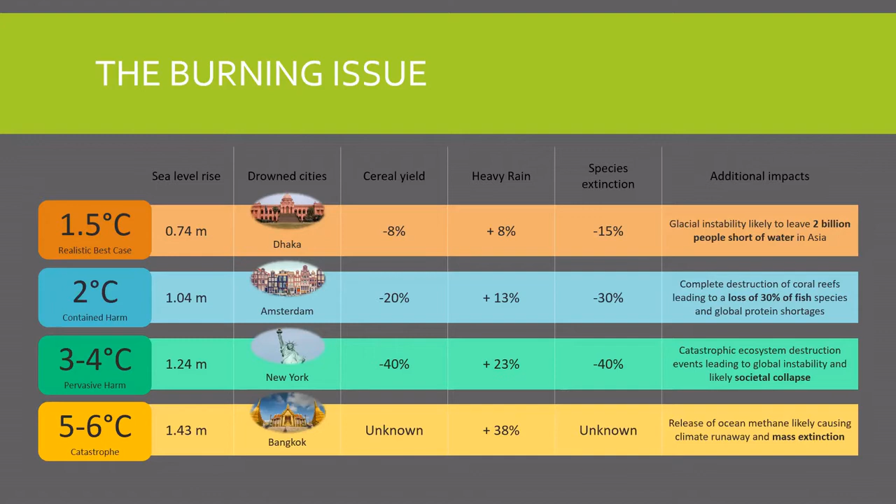So the Green New Deal primarily aims to achieve a just transition away from our current way of living to a low carbon way of living, ideally achieving net zero by 2030, which is 10 years, to achieve 1.5 degrees of warming globally. And that takes into account the UK's historic impact on warming, and we should be cognizant of that throughout. It's an international challenge, and the UK has benefited massively from our emissions, and that's something we really need to consider in the Green New Deal.

It comes from Roosevelt's New Deal following the Depression in America, and would be expecting to achieve net zero well ahead of the current legislation, which is aiming for 2050. But it focuses on structural and economic change rather than actions at an individual level. The New Deal is a massive program of infrastructure and legislation to change the economy by encouraging community and national ownership so that ordinary people see the benefits. It also creates millions and millions of well-paid, unionized, secure jobs, which isn't necessarily something we did last time we decarbonized the economy, when we closed a lot of mines and various other things.

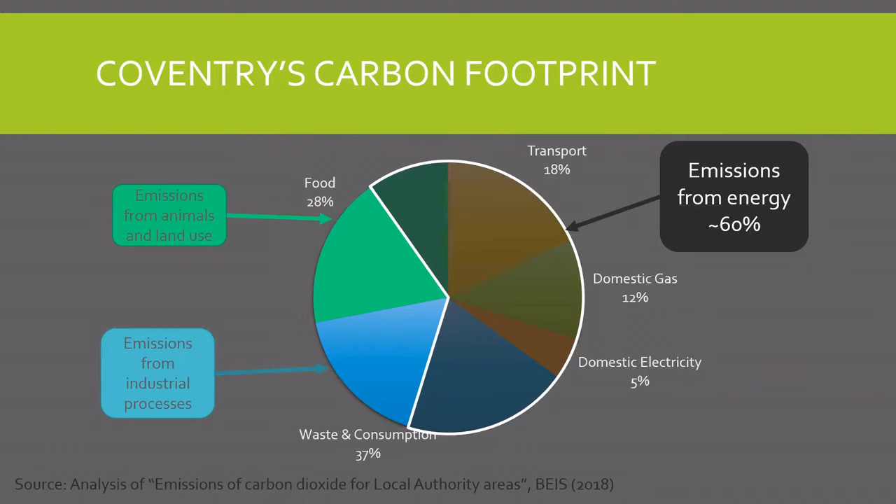So I'll start with, what does Coventry's carbon footprint look like? You can see there that the biggest things are food and waste and consumption, but also transport and domestic energy use. Importantly, 60% of that you can call energy. That's the key element: when I talk about energy underpinning everything, 60% of emissions at the moment come from energy. That would have been higher a few years ago, but for reasons I'll show you later, we've done some really good work on this and reduced those emissions.

It's used by three major sectors, and those are the three sectors I'll break this presentation into. Electricity is about 20% of energy use, heat is another 40%, and transport is another 40%. A major part of the Green New Deal is phasing out fossil fuels, that 75% of energy, and transferring that

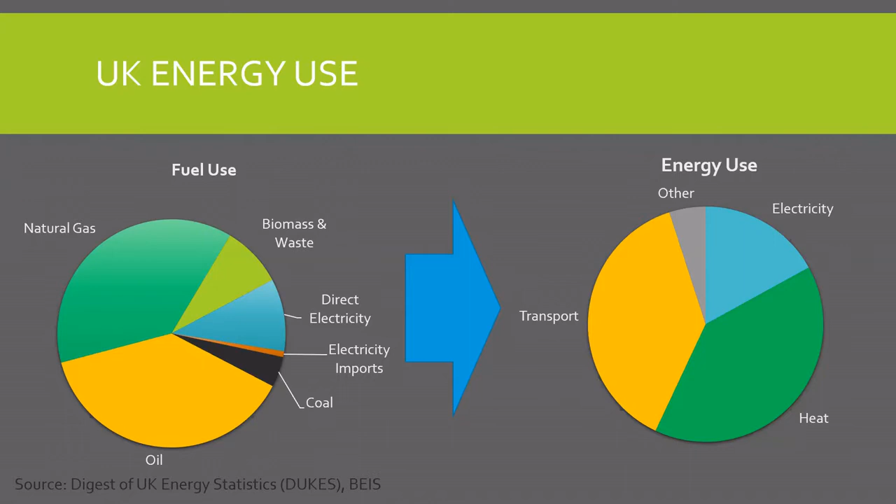to renewable and zero carbon sources. So I'll start with electricity, which is the smallest of those three, but very much is the one that I think most of us are most familiar with, and perhaps the one that has most permeated into general understanding.

I'll start talking about this as well because it's a major solution. A lot of the solutions involve electricity and increasing the amount of electricity we use, to move away from other fuels, particularly direct burning of oil and gas. So the energy system in the UK is pretty much entirely privatized.

Often they're the same as the people who supply you energy at the end, but in many cases they're a different company entirely. Often they're an entirely separate bit using the same branding.

That then goes through the system operators, the large cables that distribute electricity around the country, the big lines. Then Western Power Distribution in our area - there are 5 different ones in England and Wales, and different ones in Scotland again, that distribute it locally. That's the telegraph poles and the things that get it to your house, from the substation to your house.

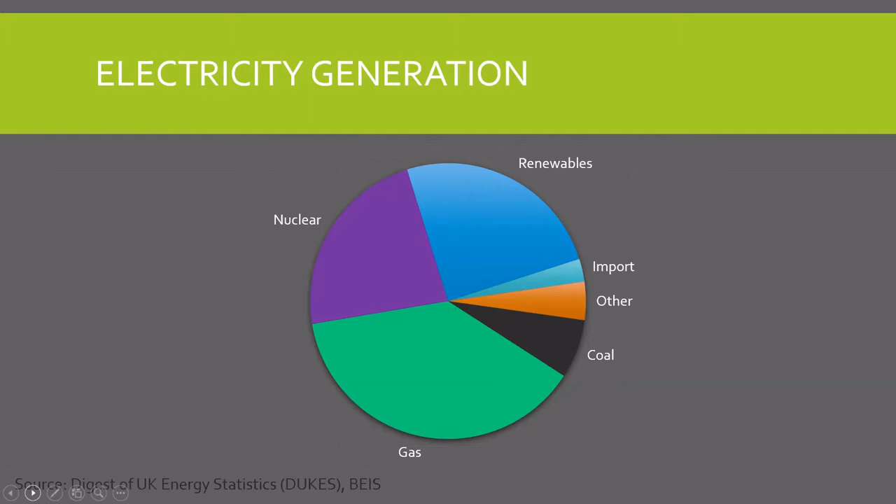It's so low now that particularly during the pandemic, some regions, particularly the Northwest, have regularly got emission intensity of zero. So we've had zero carbon electricity for an awful lot of this pandemic, particularly in some regions of the UK, which is a real good news story.

It shows what can be done when we want to, or when we have a real concerted effort. The Green New Deal is looking to accelerate this move from fossil fuels and replicate what we've done in electricity in other sectors, because this sort of shows it's possible. It shows we can do it. It's a really brilliant news story, and shows other sectors can do this if you aim to do it.

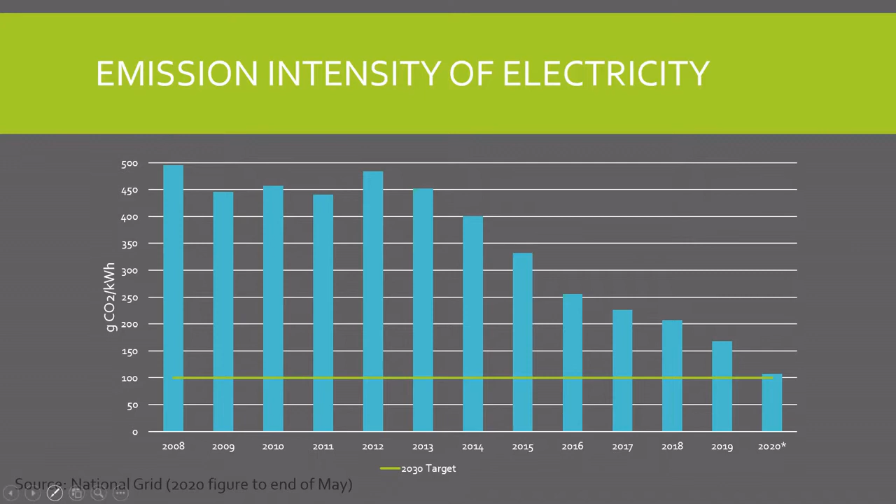So electricity demand changes throughout the day, as I'm sure you're aware. Basically overnight we don't use very much because everyone's asleep. During the day we start to use a bit more, but it's sunny. And then when we get home, we all turn the lights on, we turn the cookers on because we want dinner, and we also turn the TV on because that's what people do in an evening. And the grid currently has to react to that demand.

That can often be the challenge for renewables because they fluctuate throughout the day. So I'm going to talk about solar and wind and the challenges that leads to. With solar, on a sunny day you can have lots of generation, but it's all during the day, and it doesn't necessarily match the peak of demand. So you need something that can help you match that peak to what you've got.

And on a dull winter's day, you get much less, and it can be hard to match those two. So you need some level of storage and something to help you manage the weather, basically. Renewables are very much dependent on the weather, and you need some way of modulating that impact. It's a different challenge with wind. On a windy day, you have lots of it - you can easily power the whole country off wind, and a few other countries, frankly, in the UK. And on a day when it's not windy, you get nothing, because below about 3 metres a second, a wind turbine won't turn.

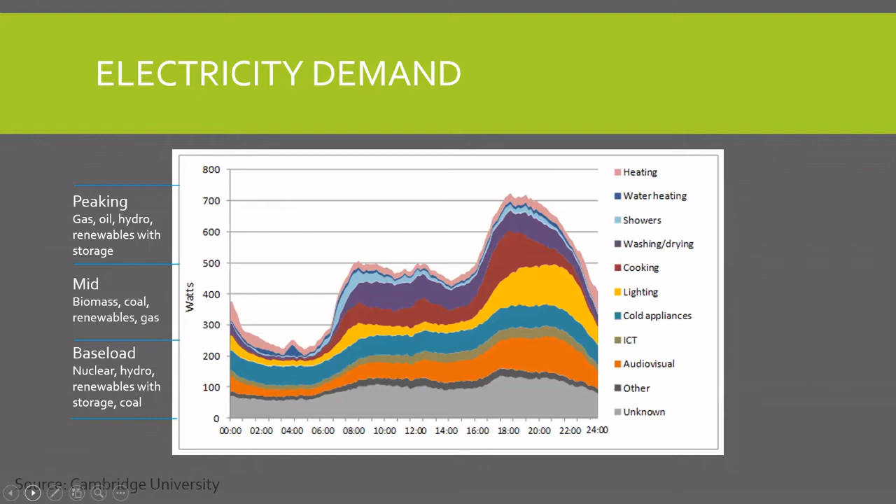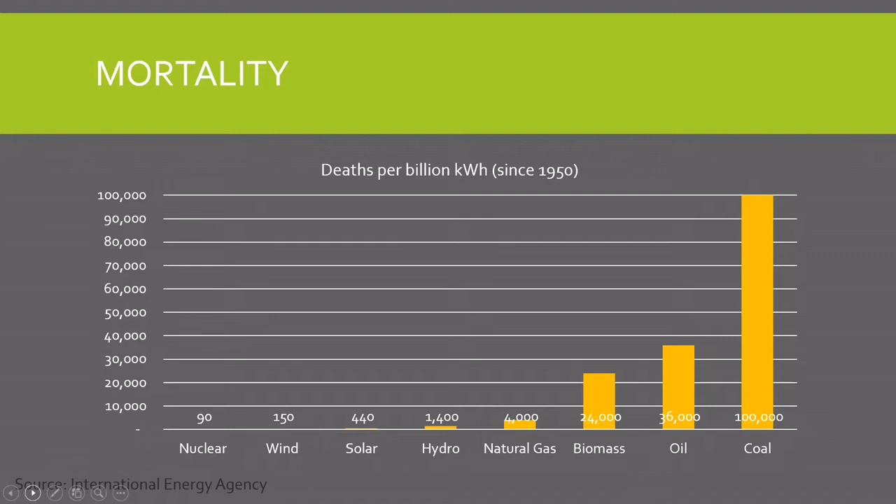The real challenge for renewables and low carbon generation in general is not the cost. Renewables are by far the cheapest source of energy over their lifetime, but the issue is the cost model and the financing and cash flow. In essence, low carbon generation costs more to build when you're not getting any money coming in. It then doesn't cost very much to operate, particularly compared to something where you need to buy fuel to burn.

And it costs quite a lot more to get rid of at the end, simply because something like renewables, if you think about wind turbines, they're often in the sea, and that can be annoying. Also, things like externalities, such as the cost of the mine, or decommissioning the mine, often isn't included in the cost of decommissioning the power plant in the way that it is with a wind turbine.

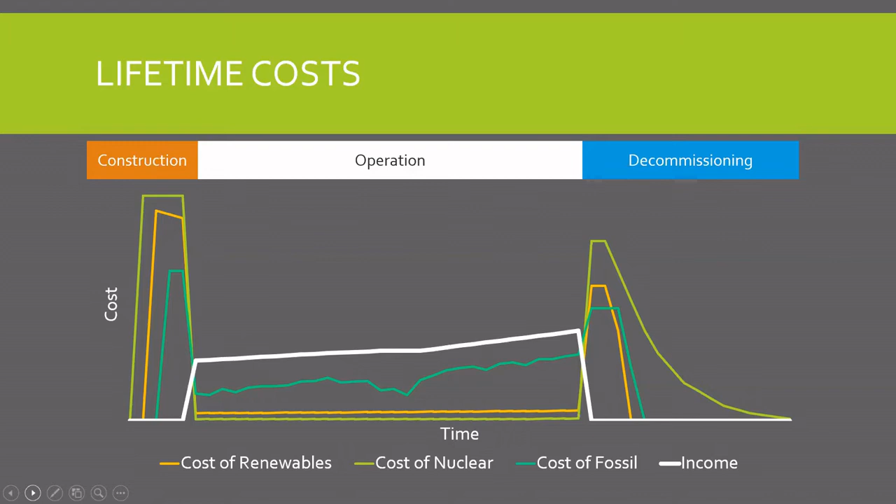This decommissioning can also last a long time, and that's particularly a problem with nuclear, where decommissioning a nuclear power plant can last between 30 to 50 years. In fact, none of the nuclear power plants in the UK that we've turned off have been fully decommissioned, and probably won't be until 2040. Well, currently they're not planned to be decommissioned until 2040.

What's important is that when you look at those graphs and the cost of different sources, fossil generation is almost always more expensive over the lifetime than either nuclear or particularly renewables. It's often slightly more expensive for nuclear, and it depends on the different pricing, but the actual cost is lower with nuclear and particularly with renewables.

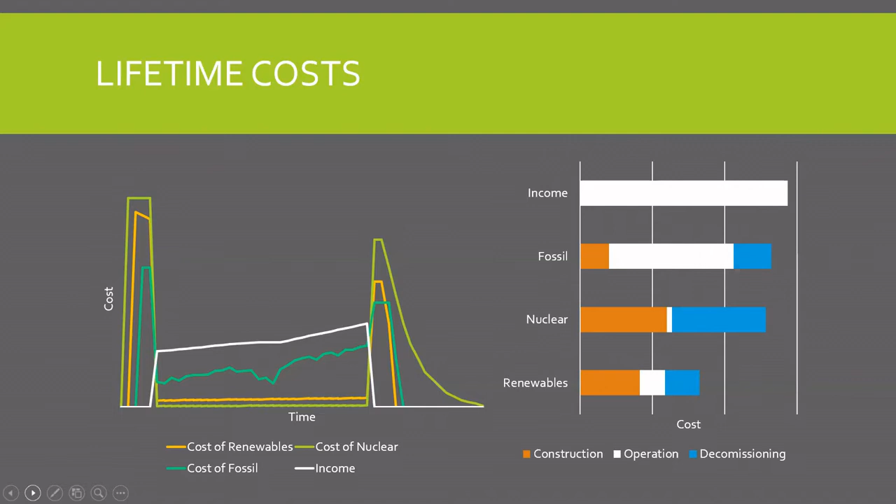But the UK policy is for a private energy market, and that means we have private financing. In essence, companies have to get a mortgage to build their power station, and because low carbon generation is more expensive to build, they have to get a bigger mortgage. If that is paid for by the government out of taxation, which is what a lot of countries do around Europe and also in America, the home of private investment...

If that comes out of taxation, the financing costs are basically zero, so the costs you see there are pretty much the actual costs. Whereas if the government pays for it from borrowing, the costs are about 2%, which means you end up paying roughly a third extra.

However, if it's privately borrowed at about 6 or 10%, you have to pay back maybe double or triple the actual cost. That's where low carbon generation is often said to cost more, because if you pay for it using private financing and private borrowing, it usually is more expensive, since private borrowing is very expensive. That masks the fact that in actual fact it is less expensive, and is why often the companies that build these things are not truly private companies.

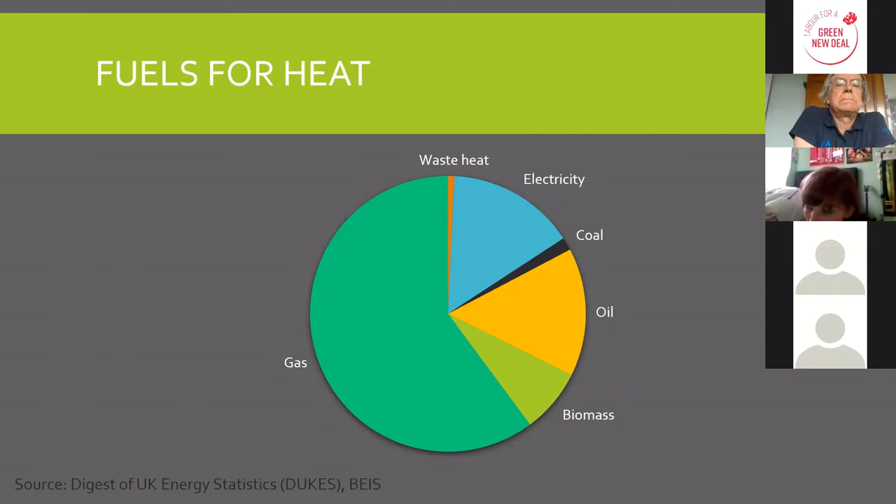The heat system in the UK, again, is wonderfully privatised, and for many of the same reasons as with electricity, this is potentially not a brilliant thing, particularly as most of the gas network and the heat system is a monopoly, particularly with Cadent, who are based in Coventry, and National Grid basically running the distribution network without any competition. So we don't get that competitive benefit. And having a fully privatized energy system, even for gas, is still pretty rare globally.

But the difference with gas and heat from fossil fuels is that we are very much dependent on overseas countries. Whilst those pipeline countries, so Norway and Scotland, are fairly friendly, Ukraine is less friendly, or maybe less stable is a better way of putting it. And Qatar, and particularly Russia and the US, who we receive a lot of liquefied gas from, that is potentially increasingly less stable. The US is not the reliable partner it once was.

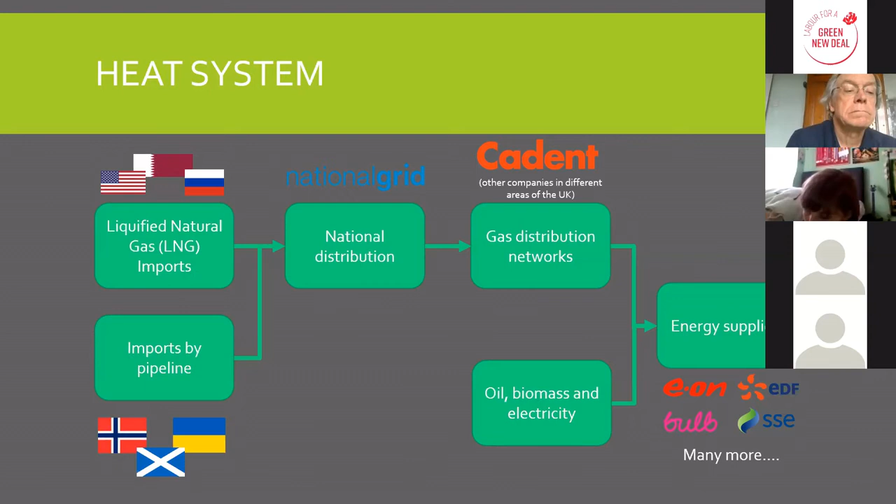It's particularly difficult if we were to use just electricity. So again, you've got the challenge of, do you have a massive oversupply, which would be a huge oversupply, or do you have something that can react that is renewable?

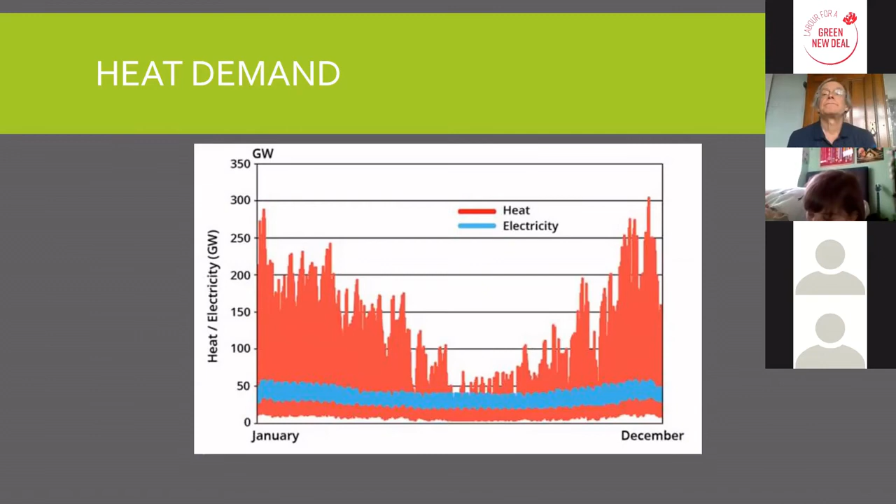So the options are, fossil fuels is currently what you use, and frankly, fire is the best way of making heat. It sounds daft, but particularly for high temperatures, which is often used more in industry, the best way of making heat is with fire.

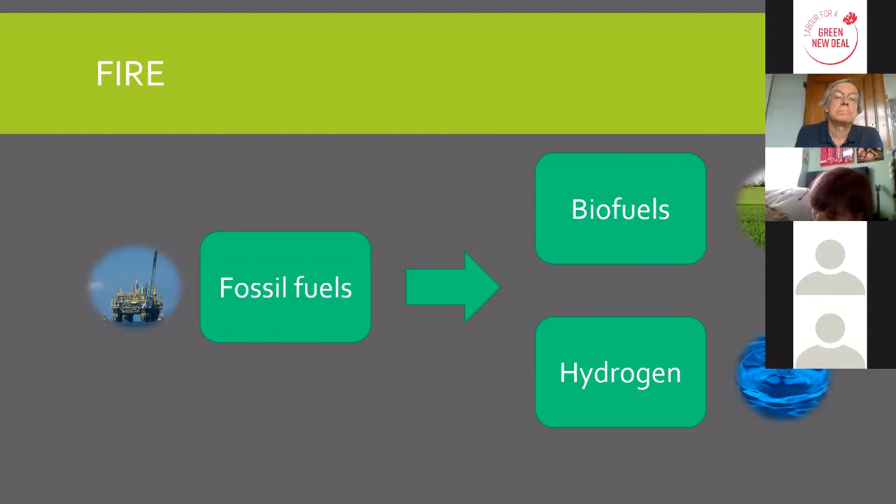There's really two ways you can do that with low carbon generation. You can use biofuels, which are essentially plants, and there are some challenges around that. It can be turned into a gas or a liquid, or used as a solid to replace existing things, existing plants and existing equipment. That's its biggest benefit, so producing biogas, and I'll come on to an example of that later.

But there are also challenges about where do you get that plant from, without competing with food and without using forests, basically - are there better uses for that land? And then the other option really in terms of fire is hydrogen.

The challenge with hydrogen is it can be produced from water, and that's brilliant. However, it can't use most of the infrastructure - it needs the infrastructure that we currently have for gas to be modified to allow for hydrogen. But also, most of it isn't produced from renewable sources - most of it is produced from gas. And that's a problem, because it can, in theory, be good, but at the moment, it isn't really.

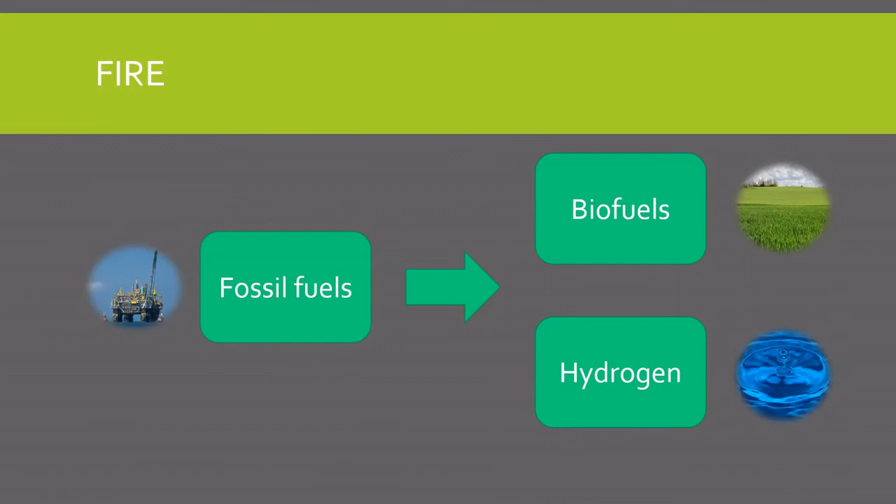And it also is quite inefficient. It essentially turns electricity and water into hydrogen, and that's quite an inefficient process, particularly compared to biofuels. We'll come back to biofuels in a minute for a bit more information.

There's then ways that aren't fire, so there's electricity, which would be quite an inefficient way of doing it because you'd have to build lots more, and you can't really store electricity for months. You can store electricity for a few days, but you can't store it for 6 months, which is sort of what we need.

There are also challenges with supply. So in essence, the only way you could do that is by having electricity that can heat the country in January, not heat the country, and have most of it turned off for a lot of the year. And that's a really inefficient way of anything working, if you've got things that are turned off for almost all of the year.

But it does work, and there is the infrastructure for it. It's a very mature technology. I'm sure lots of you have immersion heaters in your house for if there's no gas, or particularly if people have lived in houses that are oil powered because they're not on the gas grid, you will have immersion heaters for when that oil runs out.

Heat pumps are perhaps the most exciting way, though. Heat pumps take heat from the ground or the air, and they concentrate it, through quite a complex process, but in essence, even if it's cold outside, it can still be warm inside because they concentrate the heat that there is.

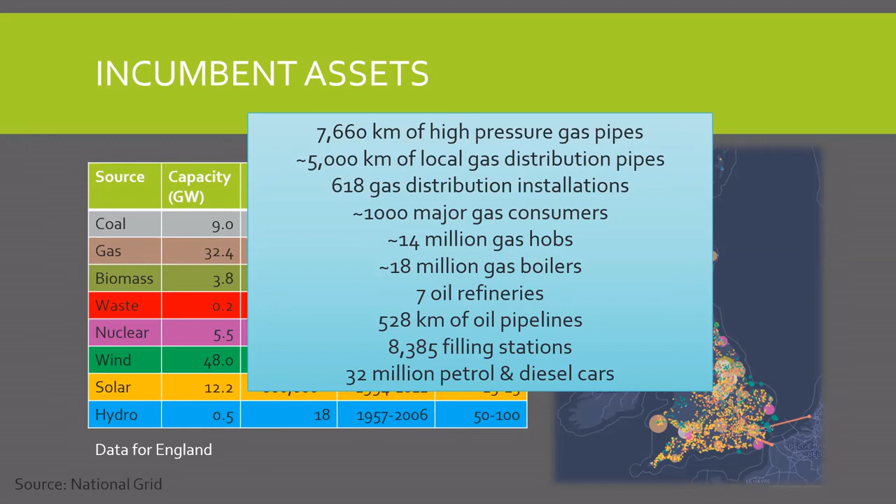So we need a solution. How can we decarbonize gas infrastructure quickly without writing it off? When you look at the embedded emissions in the gas infrastructure, if we had to replace it, that's about a quarter of the UK's allowable emissions to get us to 1.5 degrees. So if we replace the gas infrastructure, it would take a big chunk out of our emissions.

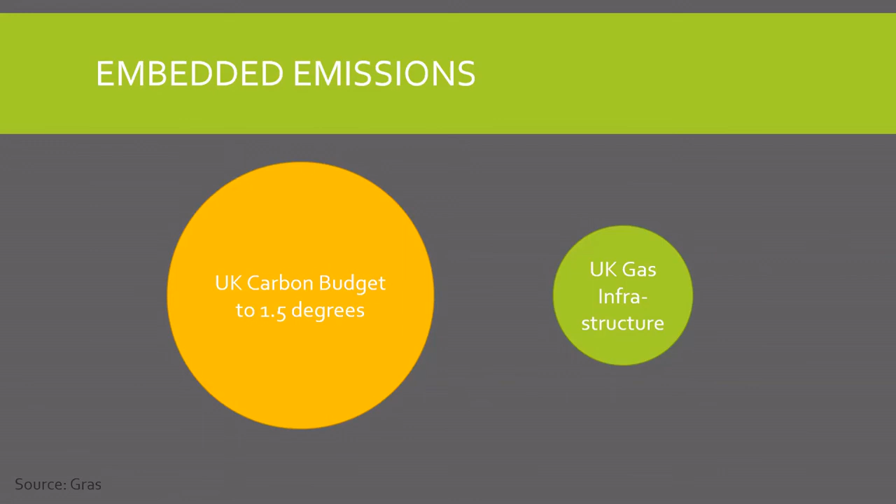But there are solutions. Biofuels in particular are a really good way of doing this. Drax, which was for a long time the largest coal-powered station in Europe and isn't anymore, was a coal plant that is now powered by biofuels. We could do a similar thing with our gas infrastructure.

One project I've worked on is called GRAS, which converts grass to gas. This solves two challenges: it solves the challenge of our infrastructure being designed for gas and being able to continue using that. To an extent we could do that with hydrogen too, although not if we wanted to use 100% hydrogen. At the moment they're testing 10%, and it seems to be going quite well. You could keep all those pipelines, all that distribution, all the appliances in people's homes.

But it also solves a big problem for agriculture. A big part of the Green New Deal is that just transition, ensuring that people can keep their well-paid jobs and keep their livelihoods.

Cattle are a big problem for the climate. I'm not going to touch on that too much, but I'm sure people are aware that beef is linked with lots of emissions. If we are increasingly using less beef - over the last 5 years, demand for beef has gone down by about 20% in Europe - that means farmers who have fields of grass aren't able to grow cows as much, or aren't able to get as much money for the cattle they do grow.

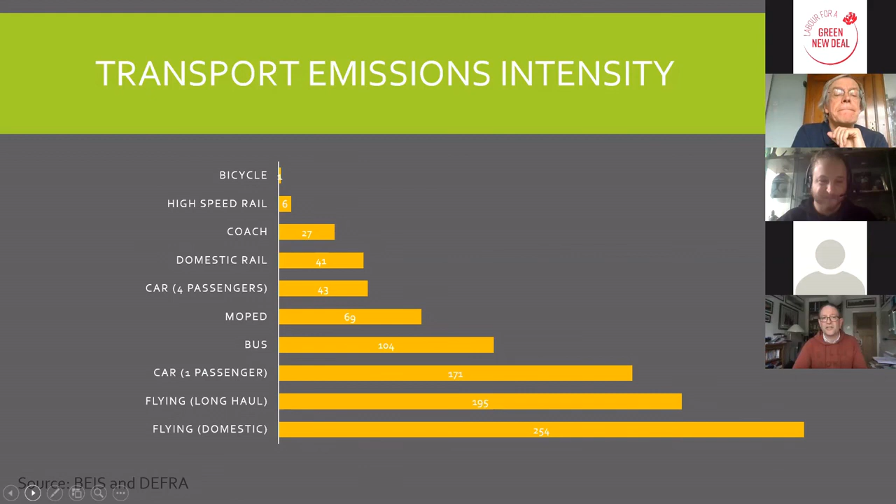The key message is use the smallest form of transport you can and the lowest emissions form of transport you can. It's moving down the hierarchy and just using the lowest emission form of transport possible. And that brings me to the real way you can reduce transport emissions and all energy emissions effectively, which is just by using less.

But the challenge is that using less is not necessarily an easy way to make money, so it's not promoted to the same extent as other methods. Using less is the best way, but no one's going to pay to market using less, because no one's making money from using less.

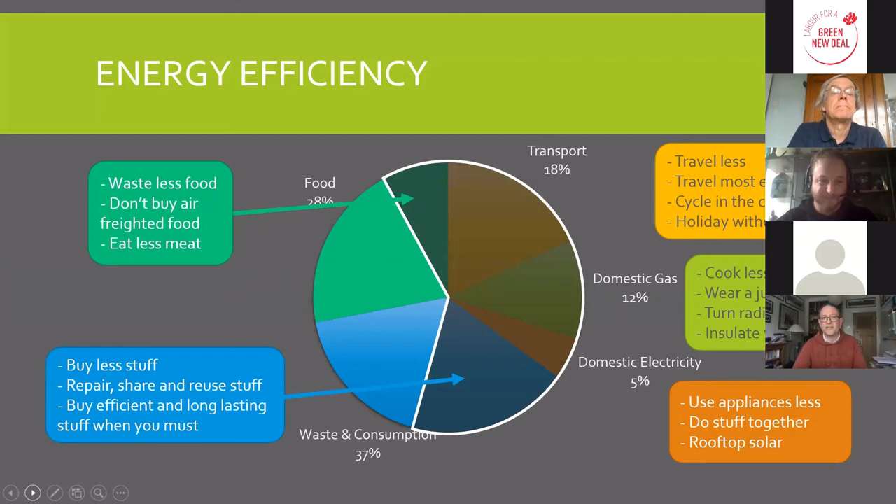There's a number of ways you can do that. I've detailed some here - just traveling less, it's really simple stuff. Traveling less, traveling most efficiently, cycling where you can, trying to go on holiday without flying. The Lake District is beautiful, and coronavirus will also help with this, obviously. Cooking less, trying to wear a jumper.

Some of this is really achievable, some of this is more expensive. Things like insulating your house is quite an expensive thing. But actually insulating your body can be as effective as insulating the whole house with a jumper.

The brilliant thing is the things that use less energy with food and with consumption - so buying less stuff, repairing stuff - doesn't just reduce the emissions from energy, it reduces emissions from other stuff as well. It reduces those industrial emissions, because the way to reduce industrial emissions and biological emissions in agriculture are the same methods as reducing energy use.

It's basically wasting less, using less, and a few other things. Things like using less meat, because meat is a very inefficient way of making food. Buying the highest quality thing you can that will last the best, repairing it and properly maintaining it also means you have to use less emissions to make the things.

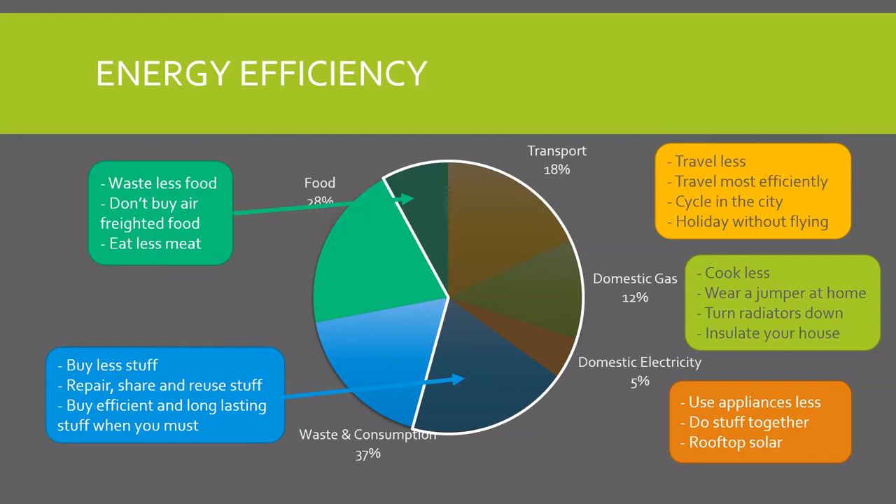Yeah, that was just the short ending piece. I think we'll launch into a discussion after this next section. So what can we do ourselves? Technology can't save us on its own - we need a level of behaviour change with that to unlock the technology.

According to the Committee on Climate Change, the UK's climate change group within government, you can get with technology alone - you can get a 40% reduction. 40% of the reductions are just technology, but really you need behaviour change with that to get people to get that last bit out. You also need some behaviour change on its own.

That's things like wearing jumpers. But we need to make the changes as well - all those things we've said about doing the simple stuff, buying less, changing your energy supplier to a green tariff. They're usually cheaper - companies like Bulb and Octopus, Ecotricity, companies like that.

Or if you don't have control of that, ask your landlord to do the same. If you're a student, petition the student hall owners, make it a campaign. Traveling less, investing - if you have a pension - in a green portfolio, which requires a bit of work, requires looking into. Many of us won't have control over that, but a lot of us will.